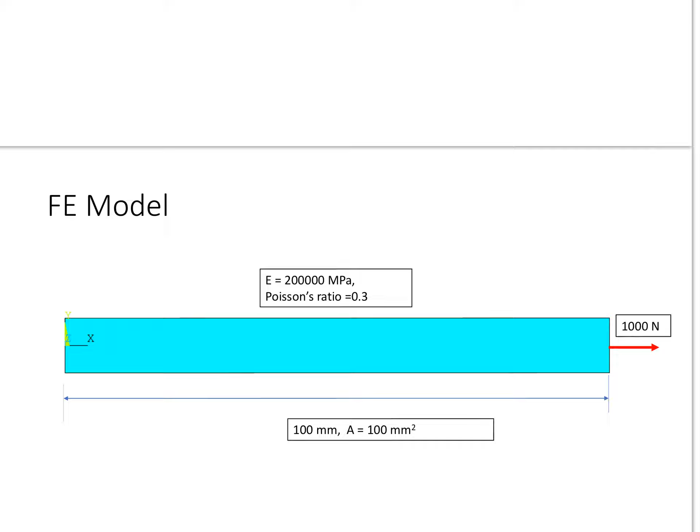In the first video we saw a small example. We talked about a single bar element. This was how the model looked like. We had a simple two node linear bar element; this was the physical problem that we were solving. Then we got the displacements. I'll skip the command stream which was used to generate the model in ANSYS APDL. So this was the displacement, and we talked about basic principles like linear superposition.

We talked about how the finite element equations will look like, and I stopped that video with two questions for you. The first question was, when you apply 1000 Newton, you got a displacement of 0.005 units, whatever be the units you are working with. Now, instead of applying a load of 1000 Newton, you take the same model, but this time I am applying a displacement boundary condition where I am pulling this particular node by the same amount, 0.005 units. Then I asked you what would be the force here?

What would be the reaction force here? Any guesses? The right answer is 1000 Newton. So these two problems are equivalent. This is very interesting. It may appear as a very simple problem to you, but when you are doing very large finite element models and you want to do a local analysis, one thing you can do is take a small chunk of the model and then do a detailed analysis.

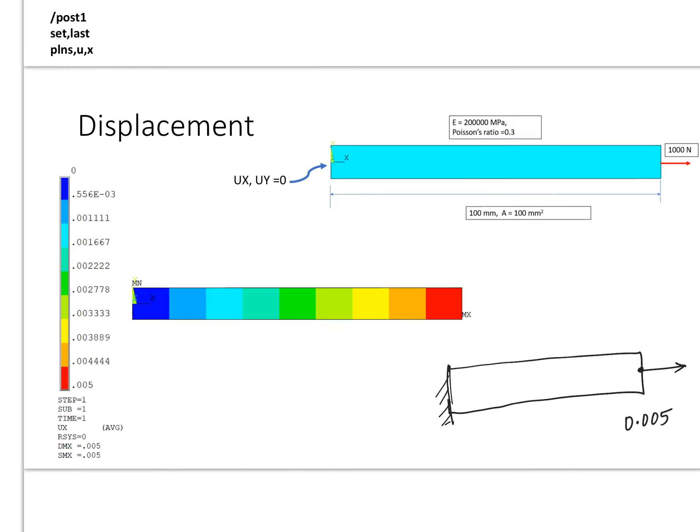Okay, I had another question for you. I believe the question was this. So now I'm applying 1000 Newton, but the difference is that now I'm fixing all degrees of freedom here as well. Here also I'm fixing all degrees of freedom. But still I'm applying 1000 Newton load. What will be the result?

The answer will look something like this. You can see there is no displacement felt by the bar. Why? Because you are applying an external load to a point which is completely constrained. There is no load transfer. This is very important when you do very large models. If you assume there is a load transfer happening, and in between you have given a very rigid constraint, or something holds your structure very rigidly at a point, then most of the load will be taken at that support. There won't be load flowing down the stream. It's a very important concept.

So this is the answer. When you completely restrain that point, there won't be any load flow down the stream. Some softwares can throw an error because you're applying the load at a suppressed degree of freedom. So don't apply a load at a suppressed degree of freedom, it doesn't transfer properly. Make sense? These are the two key takeaways in the initial session of the lecture. Now let's go ahead and see what we have got in this lecture.

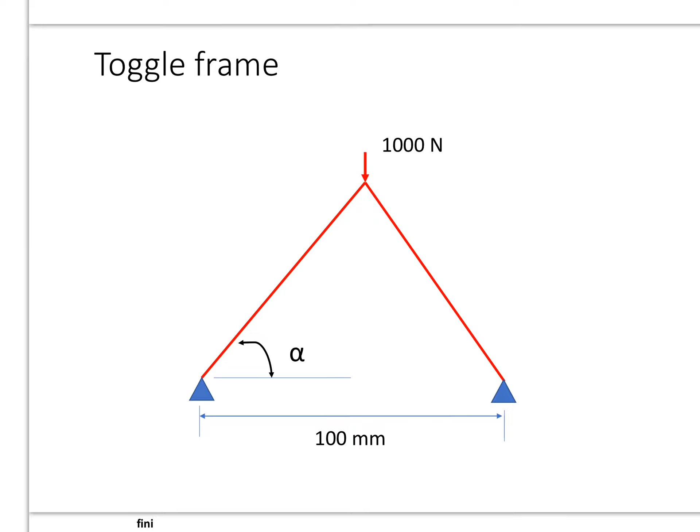Pressing forward, we have another problem here. Here we have a toggle frame made of two bars. These are the two bar elements, and we have a load application here. But before that, I would like to drive home a very simple concept. Say I have a bar element like this, and I apply a force over here. Will my FE solver solve this for me? Most probably no. Why is it?

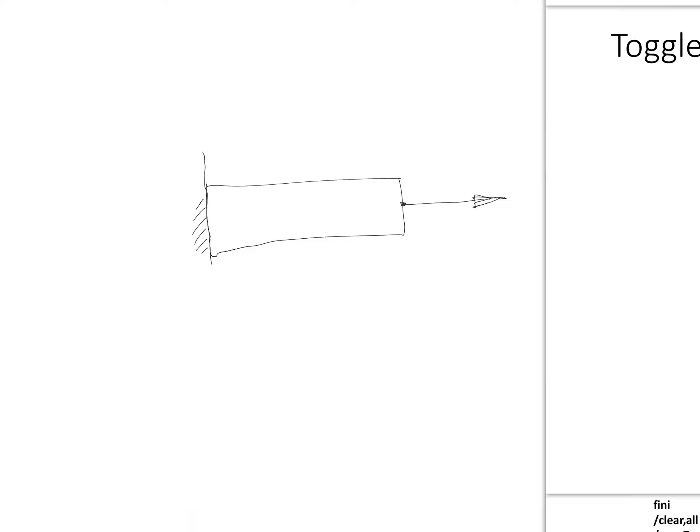Because you didn't give the exact boundary conditions. Whenever I draw this particular bar, actually in FE you won't see this rectangle. In FE you will just see these two nodes. So unless you impose a boundary condition where, if this is the x direction, you say, hey mate, look here, this node cannot move in this direction, it won't solve.

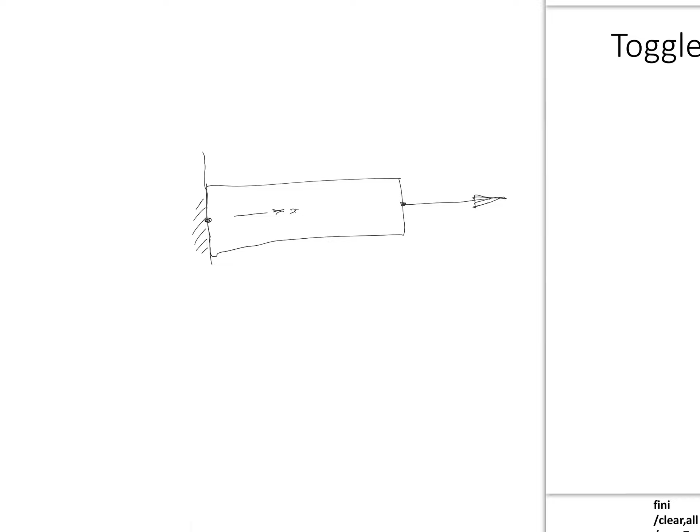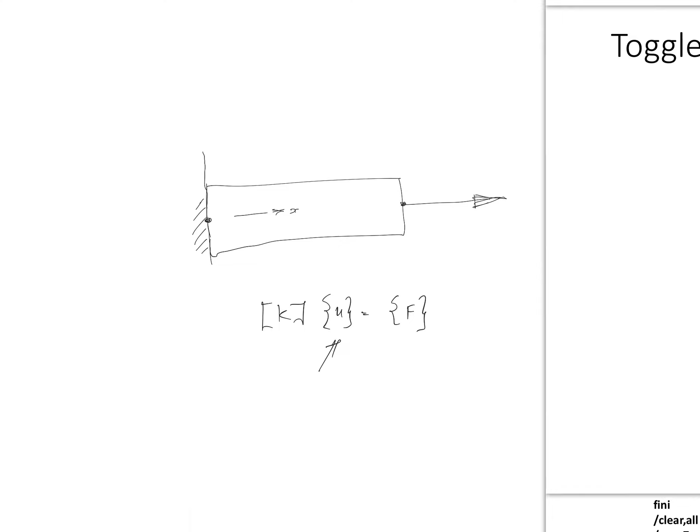Mathematically, when you don't give a boundary condition, it is as good as your symmetric matrix going singular. I told you in finite element we generally end up with equations in this form, where your interest is to solve for u. If k, the stiffness matrix, is singular, you may still get solutions, but you cannot invert it, and you run into a lot of difficulties. You can have a quick check here. You remember the stiffness matrix for the bar element? It looks like this.

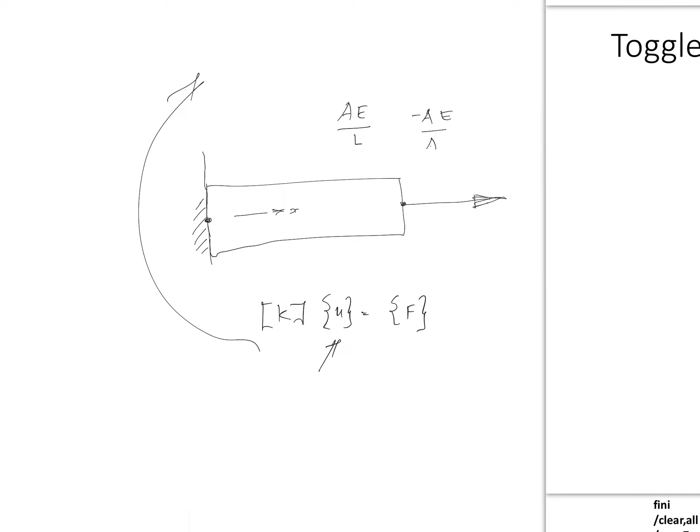If you take the determinant of this particular matrix, it will turn out to be 0. Make sense? But when you bring in boundary conditions, k won't be singular anymore. So this is one little example to tell you how efficiently you need to remove rigid body modes from your finite element model. Make sense?

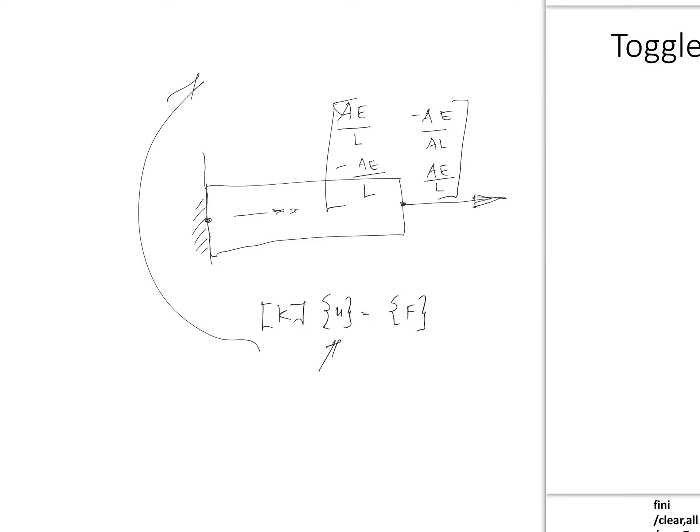Now let's get back to the toggle problem. This is the command stream that can be used to generate this model. You can pause this video and go through line after line.

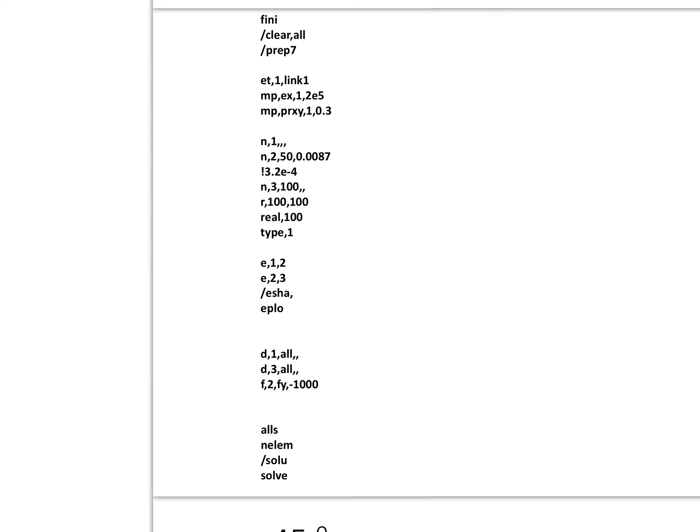First example, let's keep this alpha value as 45 degrees. Build the model, solve it. Now this is the result which you get for the uy. Y direction is this. This is your x direction. So this is how the y direction displacement looks. Makes sense, isn't it? You expect these 2 points to remain at the same point as it is, and you expect this point to move downwards, and it is moving downwards here, as you can see over here.

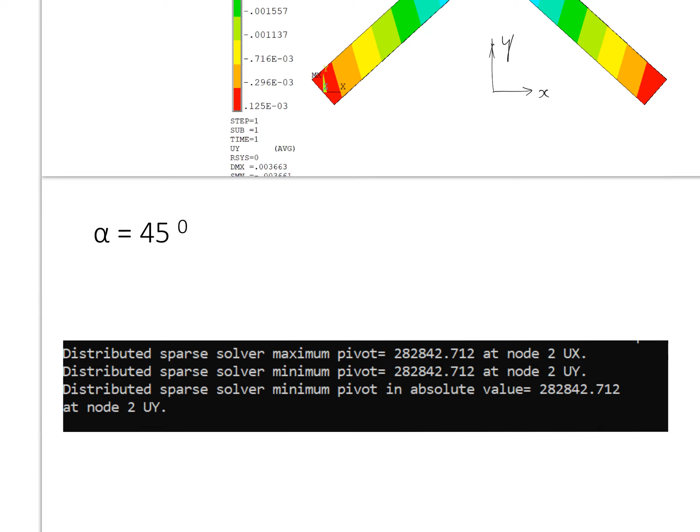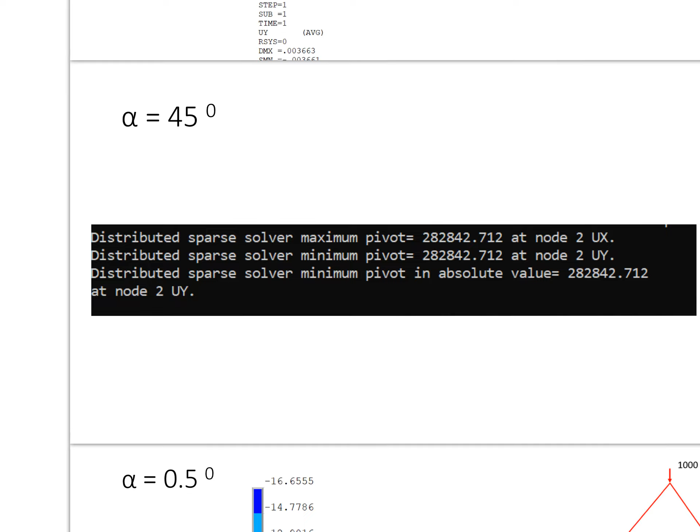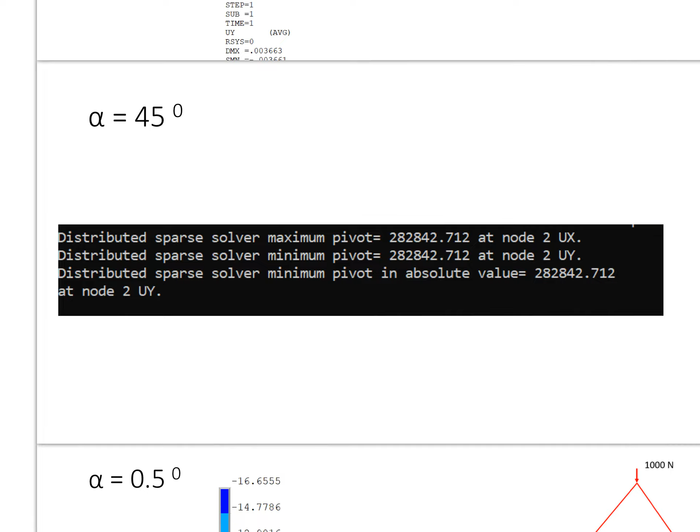Now just pay a little bit of attention to your out file, or the file where it writes all the background calculations, where the error messages will throw up. In APDL it comes in a black screen; in Workbench it's called solution information. Whatever it is, just read these values, like the minimum pivot absolute value is this much, what is the maximum pivot. Just keep these two values in mind.

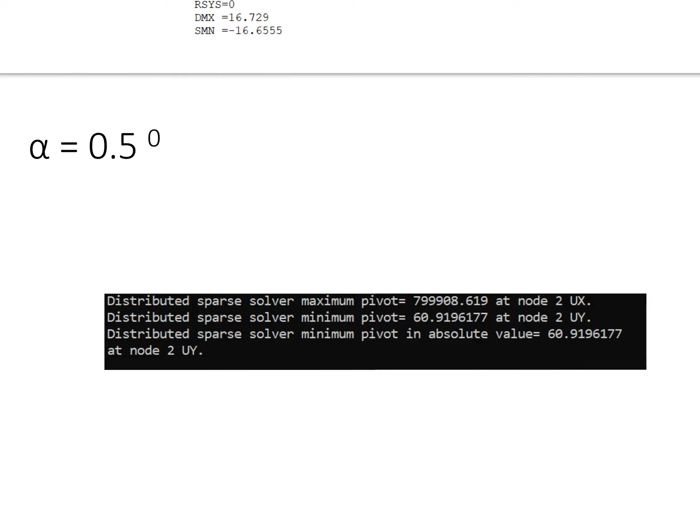Now let's change the alpha value to a very small value, something like 0.5 degrees, and again look at the same result. What is happening here? Now the minimum pivot value is again at node 2, but this time the value drops down to 60. It was earlier a very high value, now it drops down again.

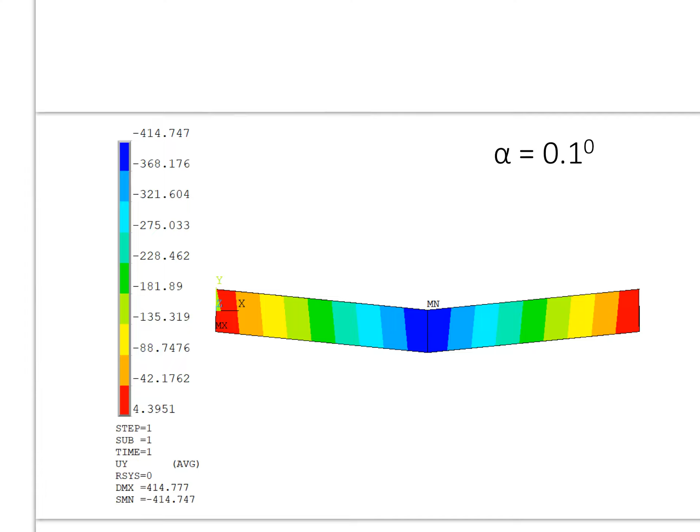Now let me again change the alpha to 0.1 degrees. The deformations are shooting up. You can see over here, when we started with alpha equal to 45 degrees, this displacement was not this high. We are making it more and more flat, so we can expect more and more displacements in the y direction. And see your solution information once again, and now you see the minimum pivot has further reduced. It has reached a value like 2.4.

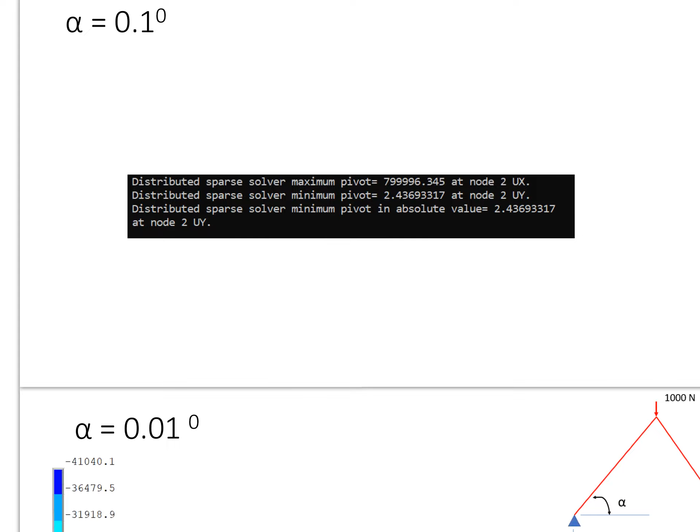Now as a final exercise, let's change the alpha value to 0.01 degrees. It's pretty flat. If I draw the toggle for that, if let's say this is a 0 degree straight line, the toggle corresponding to that small angle will look something like this. I'm exaggerating here, so this is the point where you're applying your 1000 Newton. Make sense? Let's see what was the minimum pivot value I got.

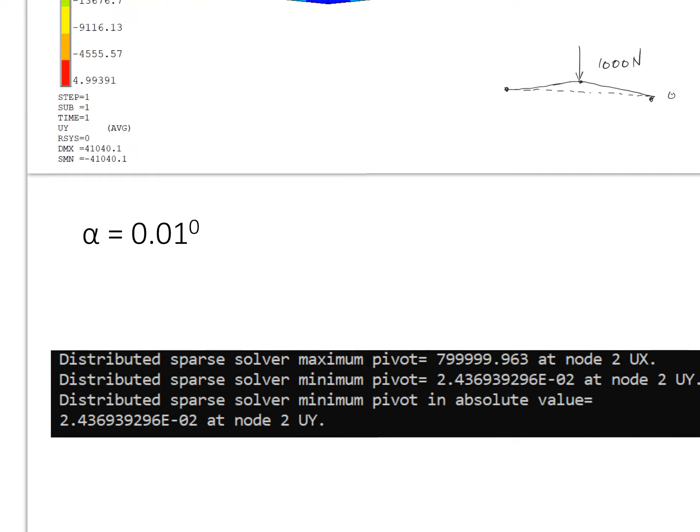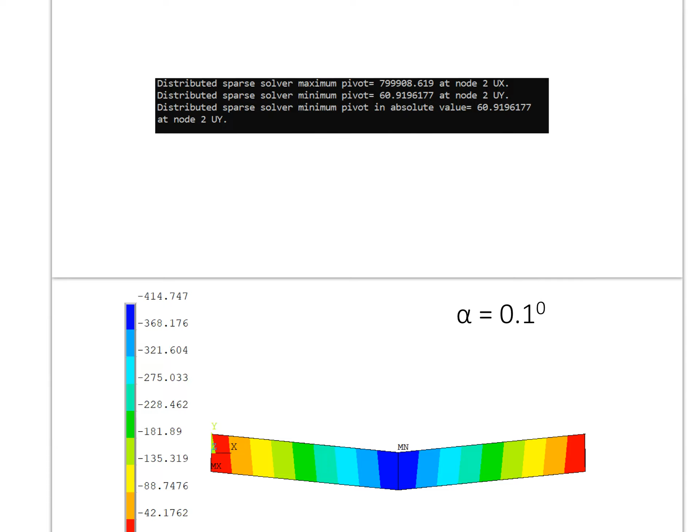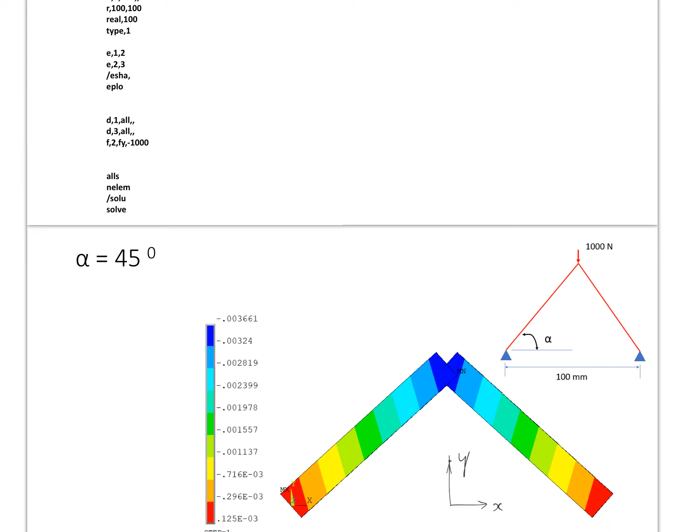Again, every time I'm getting the minimum pivot value at node 2, corresponding to the UY degree of freedom. So this is node 2. Let me make it clear. Let me just go back to the command stream and clarify that for you. Yes, I was right. You can see over here the node 2 x coordinate is 50, so that's the middle node we are talking about. So again, the small pivot value is coming at that location.

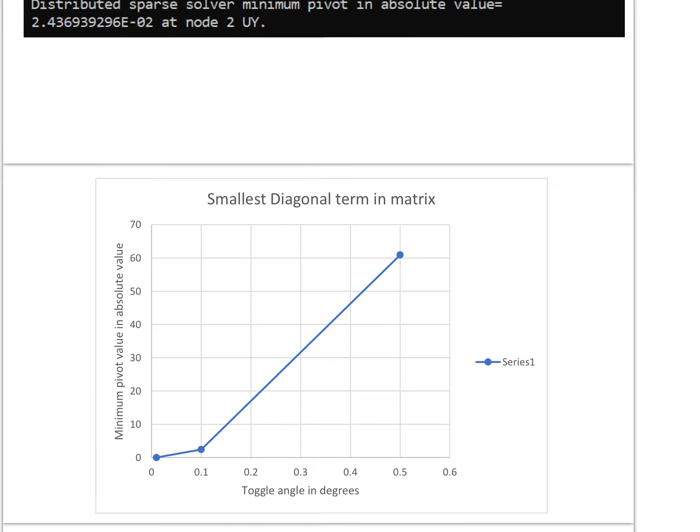Then I'm plotting it. As I decrease the toggle angle, the minimum pivot value in absolute value also decreases. Why is it so? That's a question I have for you at the end of this video. I will answer it in the next video.

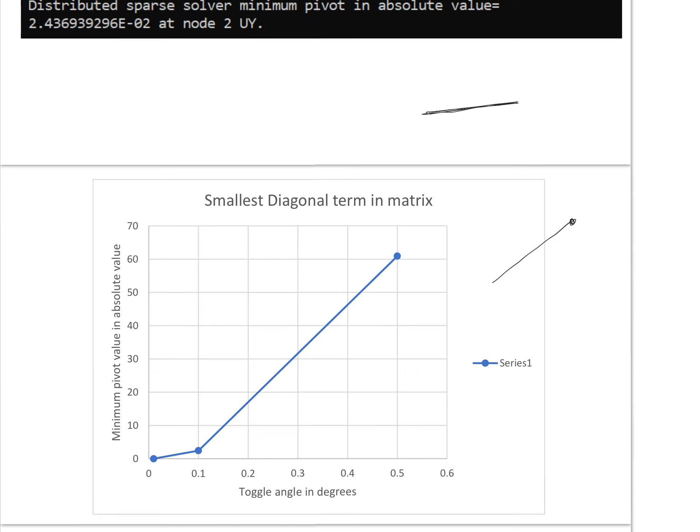But before I answer it, I have two more videos in this series of lectures where I talk about the stiffness matrix concept for a bar element, for a two-noded bar element aligned along a coordinate system, and I will also talk about how you can get the stiffness matrix for a general bar element which is inclined. So here, the global coordinate system is aligned in this way, but the bar element is aligned in this direction. How you compute your stiffness matrix then will be discussed in the next lectures.

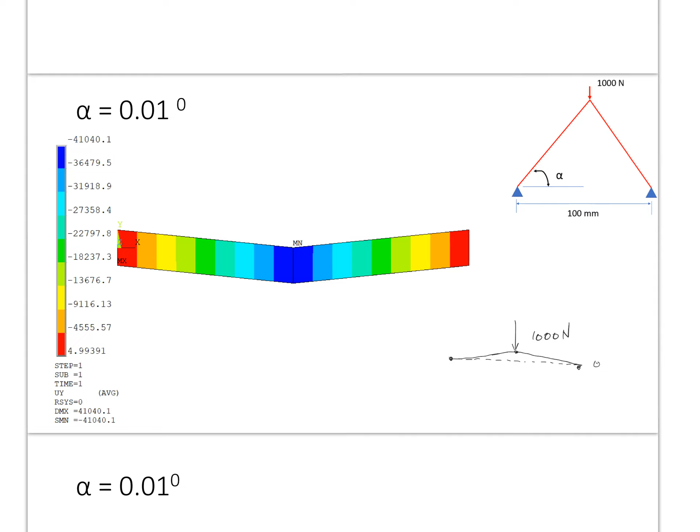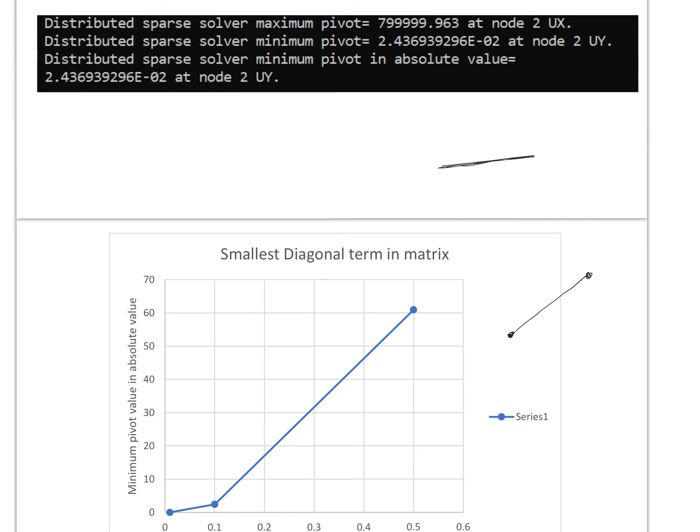So after two more videos, the one on the simple stiffness matrix of a bar element and the next on the inclined bar element, we will go ahead and answer why the pivot value is decreasing as I decrease the toggle angle. So I will have an answer in the fifth video.